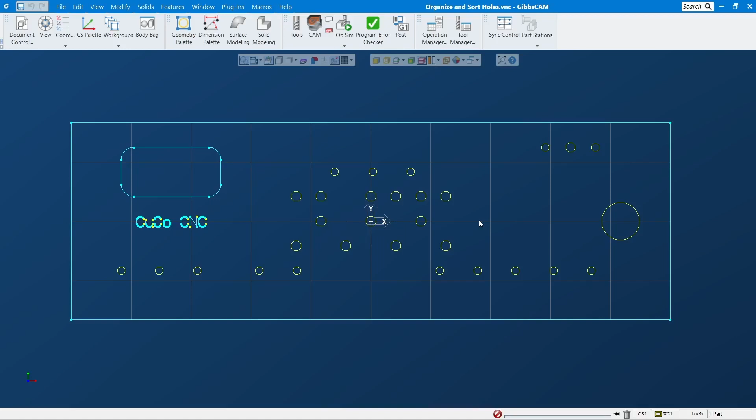Okay, let's get to this. See here, I make a whole bunch of holes, some engraving, and holes and pockets or islands, something like that. This one just has a few of it, but sometimes I've seen parts with a ton of stuff in there, and usually I don't leave it all in one work group because it gets so crowded. So usually I move it to different work groups so you can have better understanding. You can label it, name it, whatever you want. So I will show you how to do this.

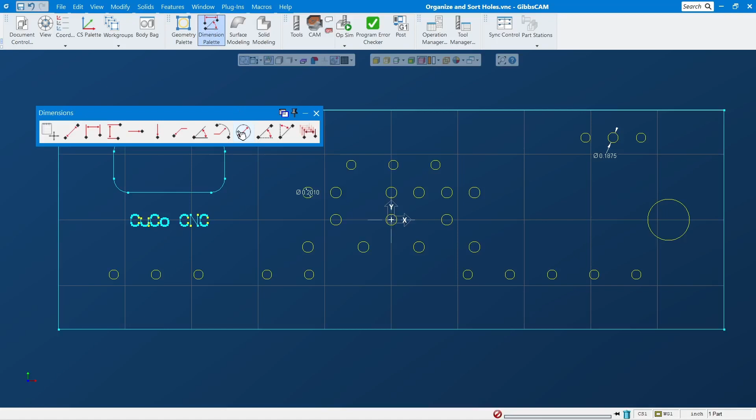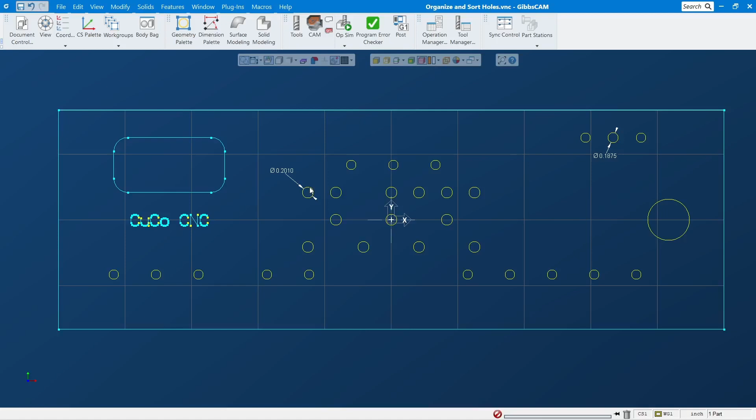Let's see here. I think I make these like the M5 tap hole, and this is, I think, a dowel hole - okay, it's a ream for dowel hole. And this is a 1/4-20 tap hole, this is just a real size, I just make the real size. So the idea is to organize each work group so you can have better understanding, and it's easier for you to program. That's the idea.

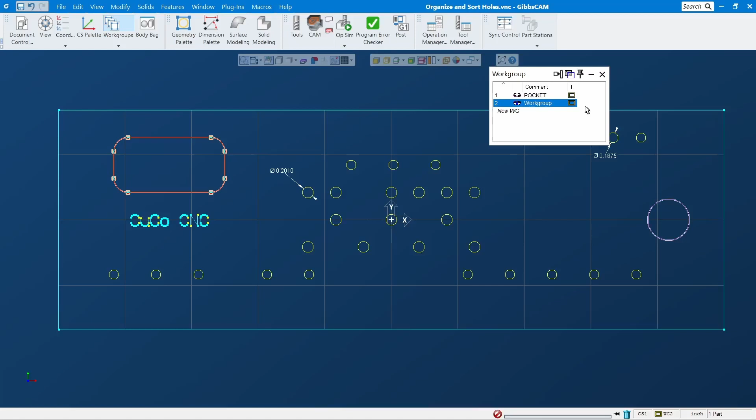So let's see here, I have work group 1 - oh, I think this is the old one, okay let's save it. So let's name this one, I don't know, pocket, something like that. Let's do this, pocket, right? And in here I want to copy this rectangle, circle, and then this engrave into that pocket. So you select it, Control X, and over here Control V. Same thing with this engrave, Control X, go back to that pocket, click somewhere and Control V. So now in that work group you only see the 3, right?

Back to here, let's do another work group. Let's name this one for 1/4-20 tap hole, okay, something like that, right? So in here you will have to copy all of the tap holes that you want to tap, right?

So let's move it over here so you can see a lot of holes here. You don't know which one is which. So this is the trick that you can use to copy just that one hole only.

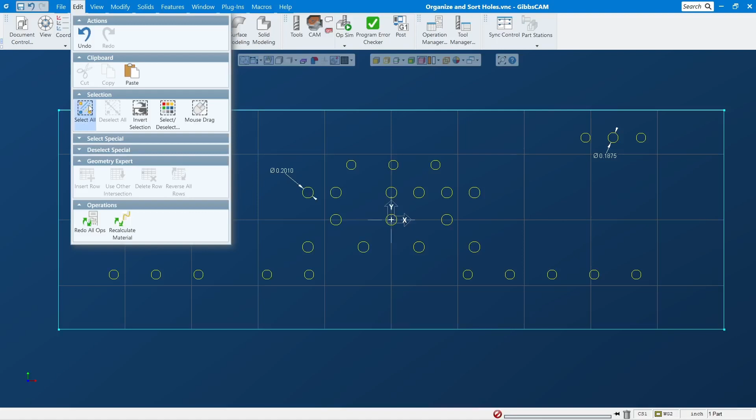All right, so go into - let's see, where is it, if I remember - okay, in here. So in this edit menu, you go to select special, and then select full circle by radius. Okay, and then when it pops up like this, you hit Alt, and then you click on that hole, right, while you hold the Alt on the keyboard - what is it, Alt, right? ALT. Alt, and then click on that, it will come up with the radius of that.

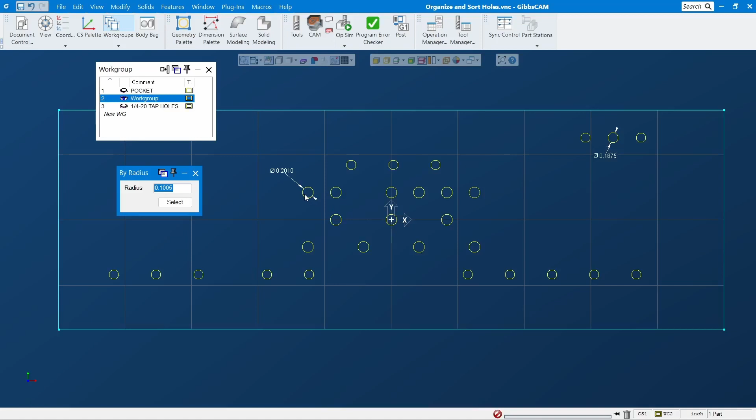Let's try something else so you can see - you see it changed, but this one I want this. So after you Alt and then click on that, it will come up with the radius, and then you click select. As you can see, it will select all of this hole, right? And then you hit Control C again, go in here, hit Control V. So all this will be just hole for the 1/4-20, right?

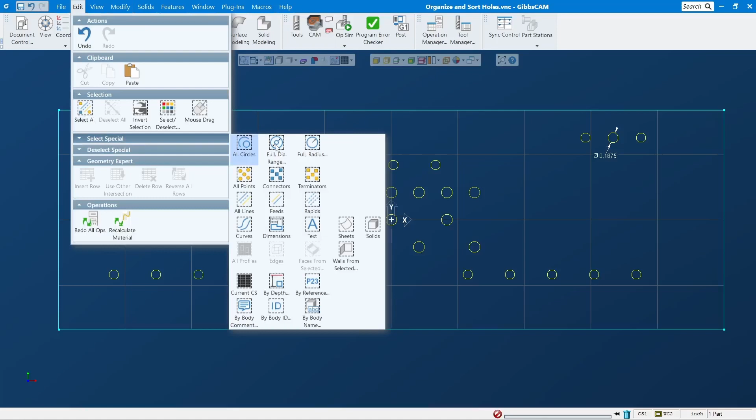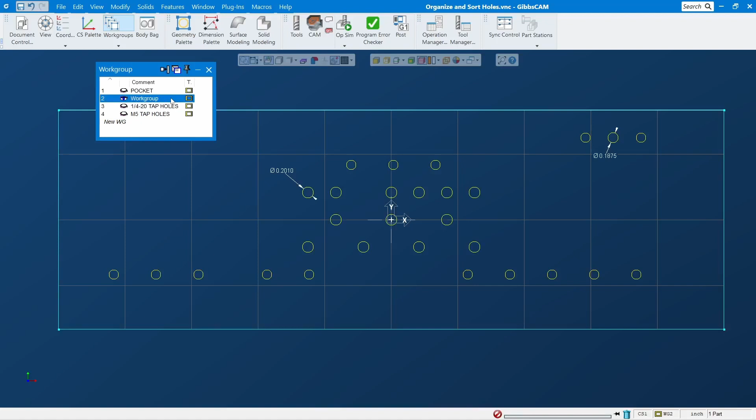So the next one is, let's do M5 tap hole, right? Okay, again, going to edit, full radius, Alt, select, okay, and remember close that so it's not active, so when you click Control C it doesn't work. Okay, and I think that's it, right?

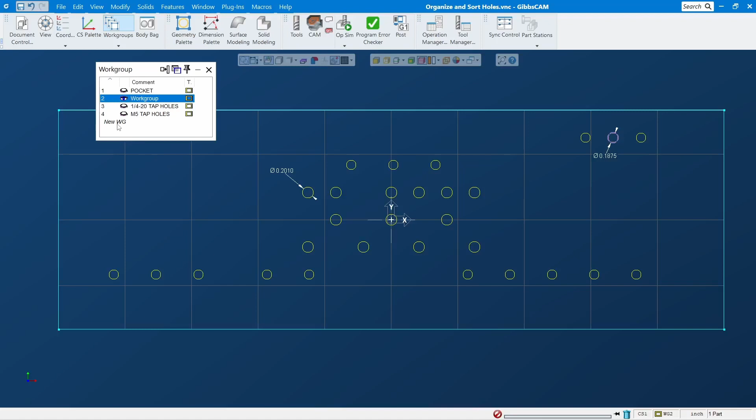Okay, so now it just - I mean, you can delete all of it and leave this one, but I want to leave it there. So the next trick I will show you. So let's do another one, let's do this one. M5... well, okay, then you just copy this over.

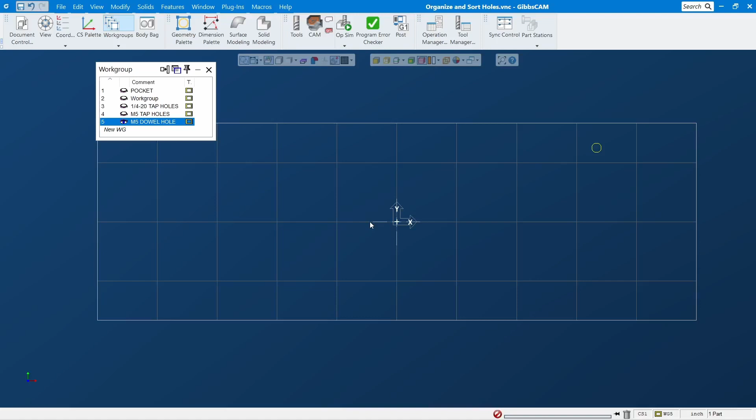All right, so that is how you organize your feature in one workgroup. As you can see there, it looks clean, but the idea is to help you know which one is with which, so when you program you don't select the wrong geometry or something like that.

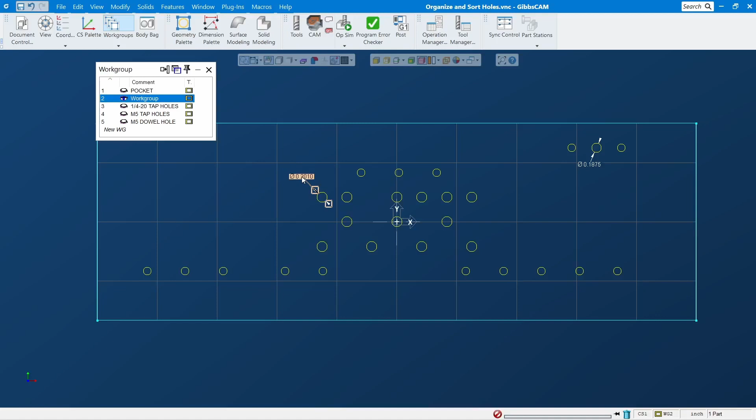Okay, let's delete this for now. Let's move that one out of the way, so I will show you the next trick here.

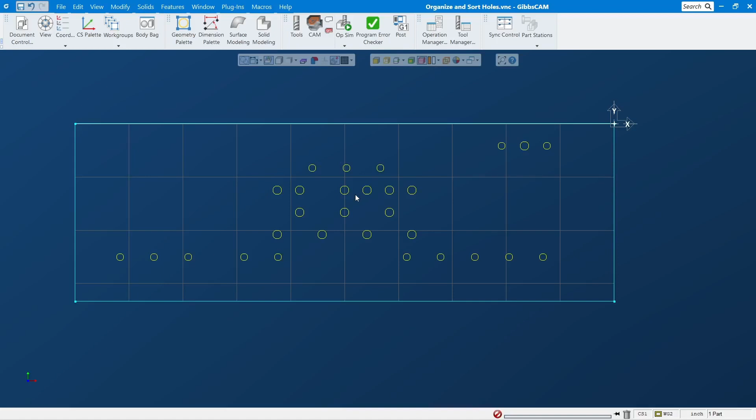So the next trick is how to sort your toolpath. Let's say you see this, it has a lot of holes in there, and let's say if you have a ton of holes like this, you do a spot drill, the toolpath is jumping everywhere, right?

So you want to sort it out. You can sort it with, usually I do one to another, like closest from one to one, from one to the next one, that's what I would say.

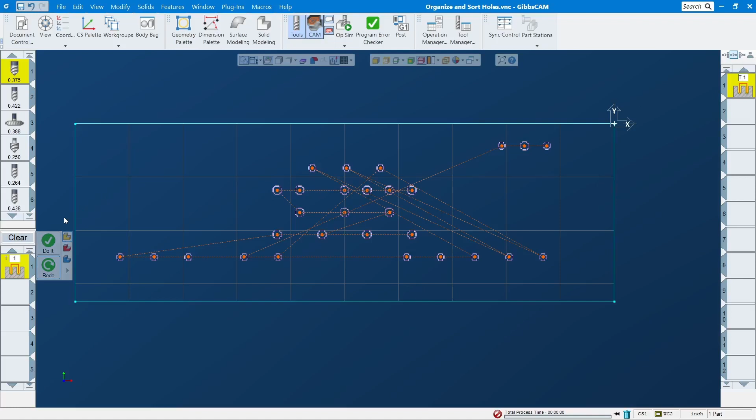So let's say you do this spot drill or whatever it is, here 264, whatever, right? But as long as the one that you want, after you do it, let's redo it. Okay, so after that you double click here and then you go into here to sort it out.

Let's see, where is it at? Okay, you go to sort here, right? Again, go to modify sort, and then it will come up with this.

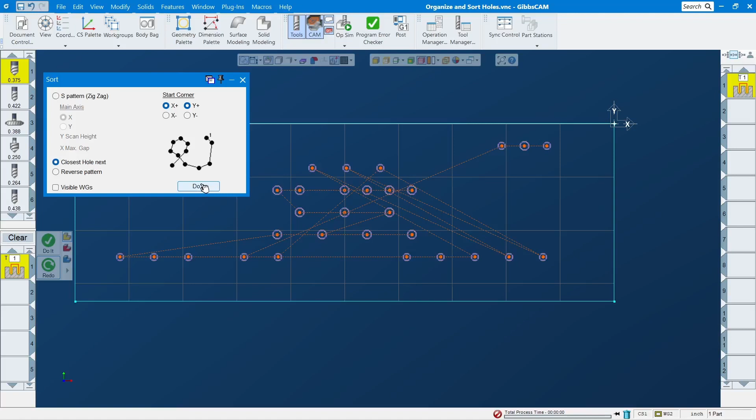Usually the easiest way, I just pick this one, closest hole next, right? And then do it, and then redo it. And you can see it much better, right? So it just, wherever it first starts, and then it goes to the closest hole next.

So the toolpath looks cleaner, and your program will run faster instead of it going here and then jumping somewhere over here and then going back to here, something like that. So that's the idea, that's the trick, you can do it for better programming.

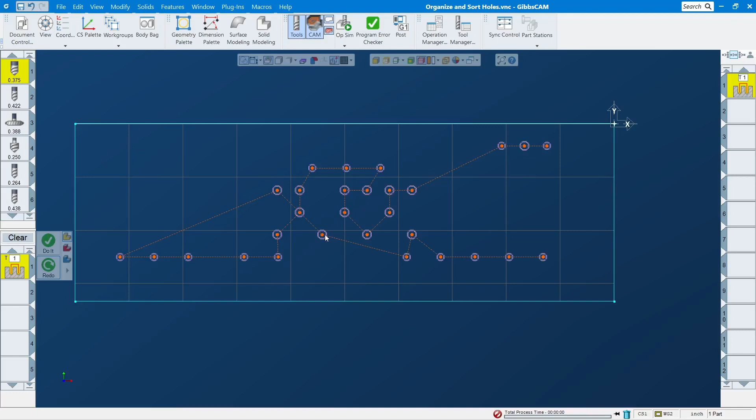Let's see what else do I need to do. Okay, so let's show you real quick here. Right, let's see when you select.

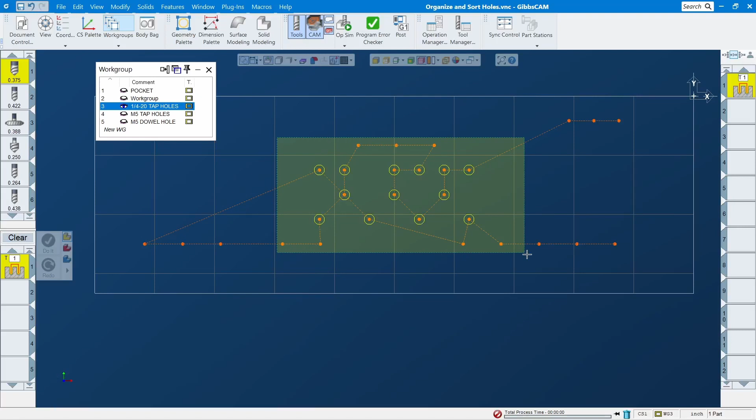Okay, and you can see it's still jumping around. Let's sort it out and see what it says, what it does here.

There you go. So I mean, it may not be much helpful to you when you have one or two or three holes, but when you have a whole bunch of holes, 10, 15, or 100 holes, it will be very helpful. So hope you guys like it.

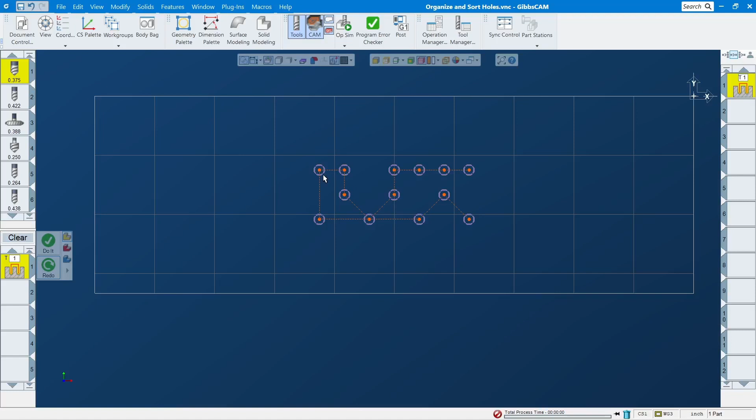All right, so that's sort, organize, and I want to show you this too. Let's say all right, so let's say you make like a tap hole plate for the fixture or something like that, right? And then you want to copy that tap hole into multiple places, the same distance or something like that. I'll show you how you can do this.

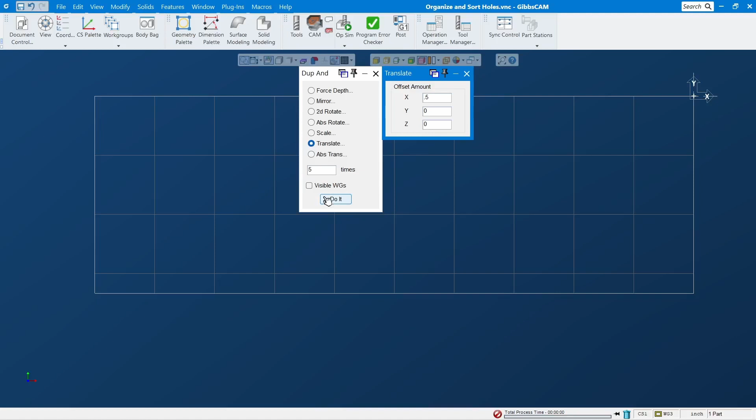Just select that and then go into, okay, duplicate and translate. Right, so let's say if you want to do 5 times, each one is half inch, you just fill this one out, and there you go, you have it.

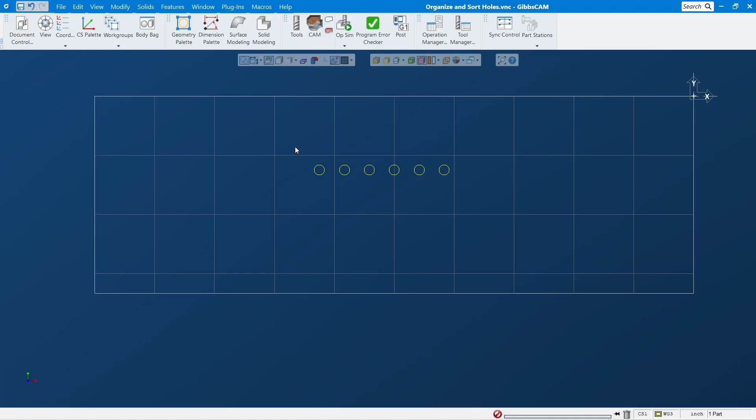So that's another trick that you can do when you want to create a whole bunch of holes or something like that with the same distance, so you don't have to draw one by one. This way it's faster. All right, so there's a few tricks and tips there you can get from this video.